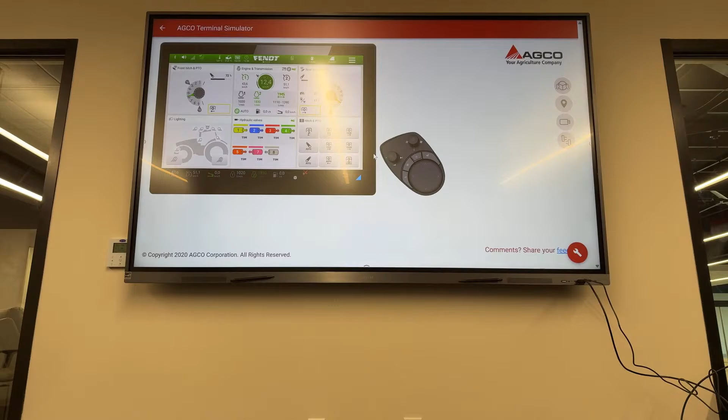That whole issue of momentum and tractor steering - it wasn't playing right. Remember that last year? We had all those issues. What did you end up doing then? Straight AB lines? I just used row markers. I just trusted myself because I never go... That is not cool because that Fendt thing usually steers pretty awesome. Do you want to log in and check?

So then we updated everything and it would work. Since that point, I would do coverage guidance around the edge of the field and it could be - like a straight, I would have just drove the headland and it's just like a square field and it would wander, like I'd be 40 inches and then I'd be overlapping the road. It would just wander. Even on AB? Not on AB, no, it's fine on coverage - AB, but coverage guidance, stuff like that, like on the next pass, like when you're actually supposed to be following the line. Even on this, it was okay, ABs were fine, coverage guidance was not.

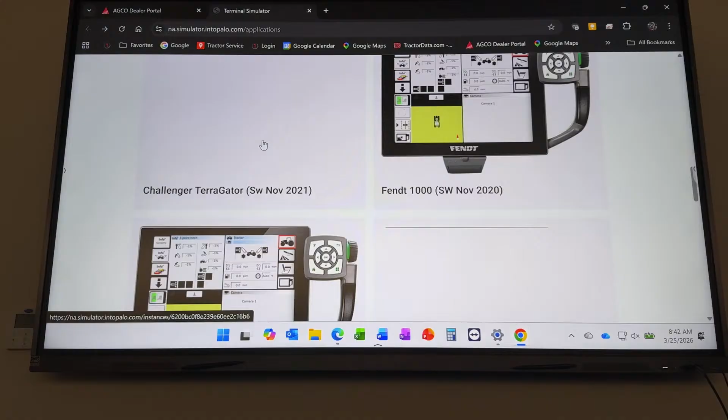TJ, look at that, it's fun. Is yours working, Randall? My computer's booting up, I'm not quite sure what's wrong with my computer. We're really having a bad morning here. My computer's going through a restart and it's not doing anything. That's fine, I'll go under the old one. We're going to the old one. We'll work it out, that's what we had to do. It's so weird, it like works and then...

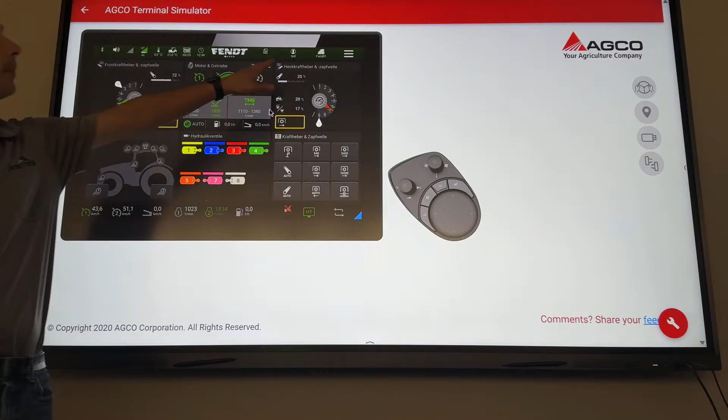Okay, so that's the work profile. That's cool. So we got admin, and here we can pick Ted. And now we loaded Ted, and you can see he's German, he speaks German. So if you do have multiple guys running different native tongues, you can set each of you up to run your own language.

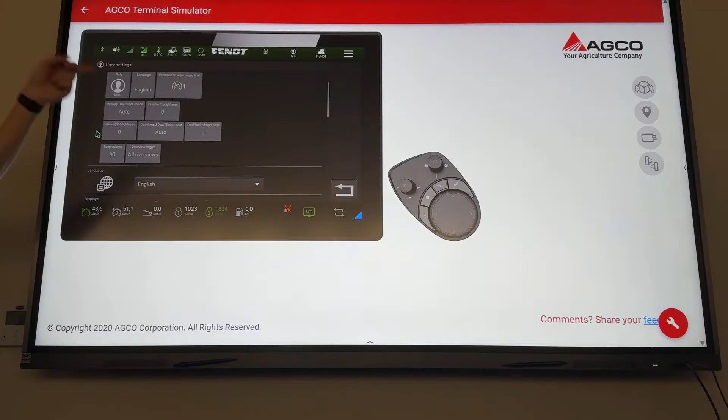But what I really want to point out is this part here. This would be what we called user settings in English. But all that's being changed in there is these things. Let me change it to English so you guys can read it. The user settings, you can change the language, the windscreen wiper, how that works, your brightnesses, and your beep volumes. That's all that's saved within the user profile.

So it really is only made for... unless you have the new seat, or the added new seat too. Then the settings are saved in the user profile for the seat.

Yeah, the titanium. Do you guys have the new leather seat in yours? Massaging and all. You don't have the massaging. It's just you guys.

So when you're switching users like that, say you have a guy that sits really far back, seat laid back, and another guy that sits way up front, seat straight up. When you switch between profiles, when it was saving that, doesn't that save that seat profile, how the guy had it switched and whatever?

That is, because the seat is saved in the user profile. What it was doing there when we switched users was updating the work profiles, just making sure it didn't miss anything before it changes the screen. So how do you update the user profile? Well, it should update that automatically when you switch, I'm guessing.

Okay, so now you can see Ted's switched to English. So the question was, if we change users, will it save the seat setting? I think it automatically just happens in the background. So each time you change it, it should save wherever your seat is.

It'll save the seat. So if you jump in and move it where you want it, and then you go and hit change to your next user, it'll screw the other guy's seat settings up. Yeah, that's what happens sometimes with us, when you got three different guys jumping in it, it gets moved around a little bit.

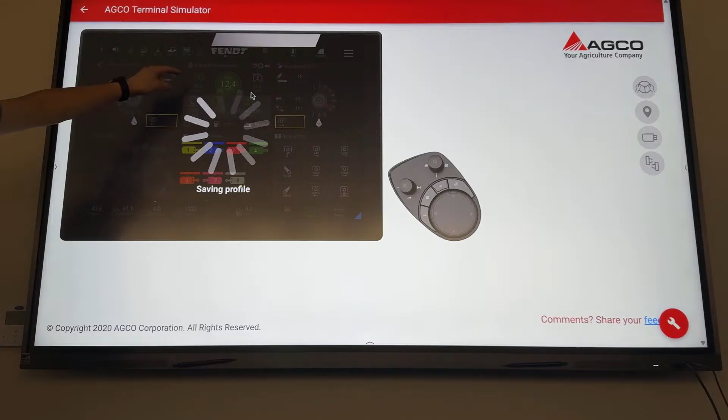But if you switch back to admin here... when it gets done.

So we switch back to admin. Also, whenever you switch users, it asks you to pick a work profile, like your planter profile, your spreader, or whatever work you want to do. So I'll just hit that.

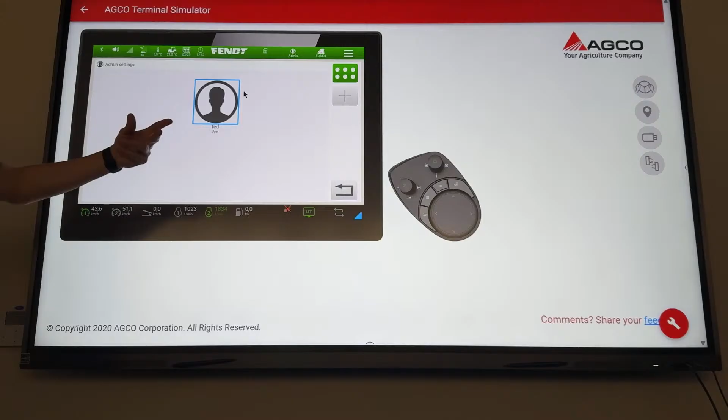Now if you go under admin here, you have the options to go to admin settings, because admin by name is an admin, and he can go in here and add and remove users, make more names and stuff like that. So if you can't add a user, you might be in a user that's not set to an admin, if that makes sense. Kind of complicated, but for you guys with this seat, this is kind of important.

That guy, he can go in there and change it to someone else's name. There's no limit at this point. He can go in there. It's not password protected. There's no passwords in between there.

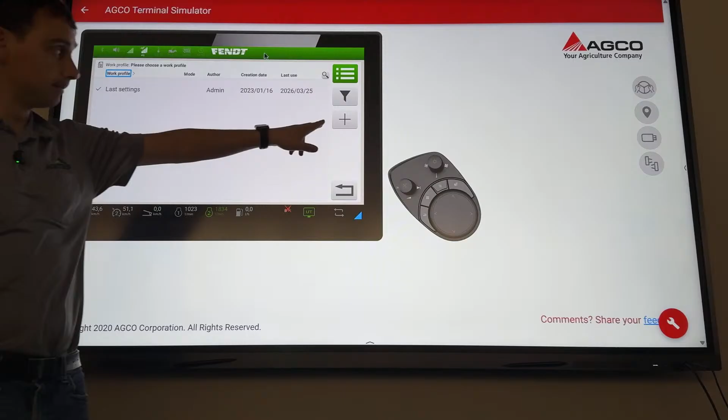So back to work profiles, I wanted to show something else here. So here's where you hit that up there. It shows you all your work profiles. To make a new one, you just have to hit this. I'll just put in drill.

Do you guys know what this is? Do you guys play with this ever? It's the AB version of the profile. So you can have a profile, but you can have two ways of running it. I guess in the drill there'd be some where you would use dip-switch remotes or something.

Do you guys use AB mode? I personally wouldn't use it. I don't like to set it up that way, because then it just confuses the next option. People get so confused - is it A or B? It's all the same. So I would recommend, that's what I wanted to show you guys - don't. I mean, if you want to, you can, then you have like two modes under the same name. But why wouldn't you just make a new profile and name it drill A, drill B? So that's complicated.

But all the layouts here, like the layouts of these tiles, is saved to the work profile. And that's something people often ask - how can I get my layouts always to be how I want for this implement? Because obviously you've got different layouts for different implements. Some you want the map screen here, some you want the hydraulics here, some you want the cruise here. Like when you're carting, you probably don't use GPS at all - not really, usually, unless the people try and set it up.

Don't tell me too much. Hey, people do it up a long hill.

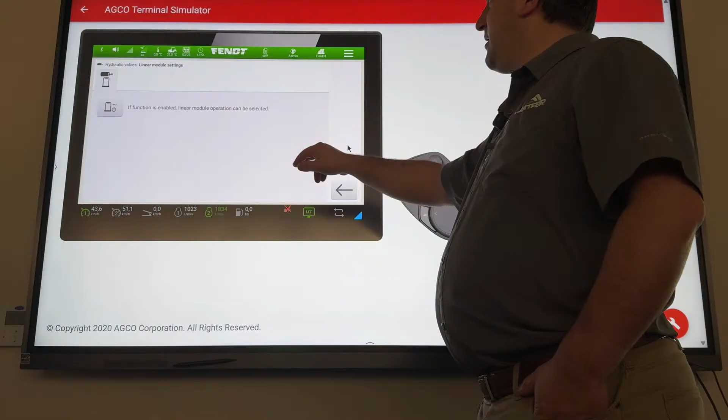So if you go into here, it's not in this one, but it would be here, another button you hit right there. Basically what it allows you to do is if you toggle the remote on, whether it's plus or minus, the next time you bump it, it just goes into float immediately. So if you have a hydraulic motor spinning and you want to float it to the stop, it'll automatically go to float. You can't accidentally not float it.

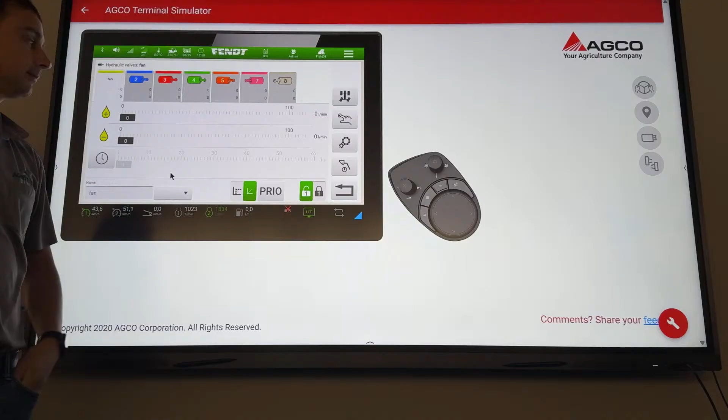Okay, any questions on hydraulics yet while we're here? What's that loader one, I forget. Oh, that's assigning the crossgate lever, that automatically happens. Is that when you hook up your loader? Actually on the tractor screen? I never saw that icon. Did anybody else, on our tractor? Yeah, I was gonna say that's a new one for me. I'm not quite sure why that's there.

All right, let's go start with the implement setup. That's the most important part of the GPS, because you have to set up the implement width, or it doesn't know how wide to make the passes, right? So it's very important how you set this up. The easiest way to get there is hit this top right corner, that's what we call the hamburger menu. Tractor functions, anybody know which one it is?

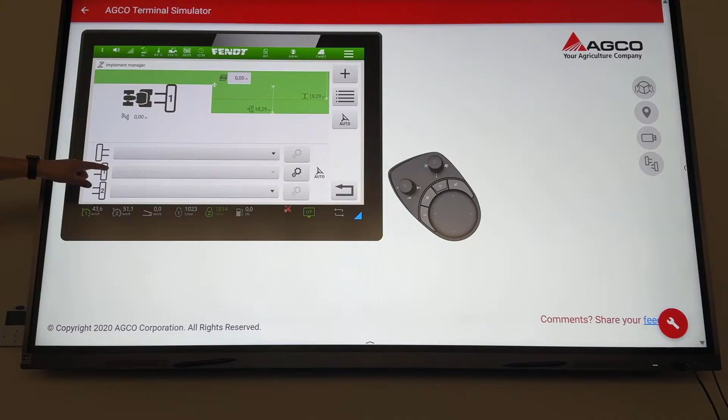This one right here? Yeah. All right, implement manager. So this is the implement manager overview. We can set one for the front and two for the back, 2 implements for the back. If you have a momentum, it automatically populates, any isobus implement automatically loads the widths in there. Like in this case, you go in there and it's already loaded. Now this thing's all in metric, so it's all messed up.

So we're just going to make a new one. It's called Implement 1. What implement should we set up today?

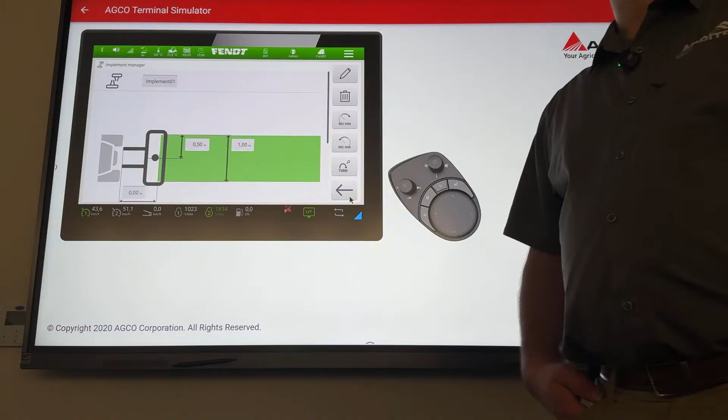Anybody have one that was really challenging, or it was kind of weird and you couldn't figure it out? Yeah, that planer from last year, whenever it pulled a little bit to the left, we were trying to figure it out. So if you have an implement that doesn't quite run straight behind you, let's just say...

I'm going to enter these numbers as if they were feet. It says meters, but I'm going to enter them as if they're feet. So we're going to have a 40-foot planer.

Where does that 20 number in the front come from? Anybody know what that 20 stands for? To your drawbar. Drawbar to where? The edge of the right side of the implement. Yep, to the edge of it, but it's actually the far right side. So that's how you get your offsets taken care of.

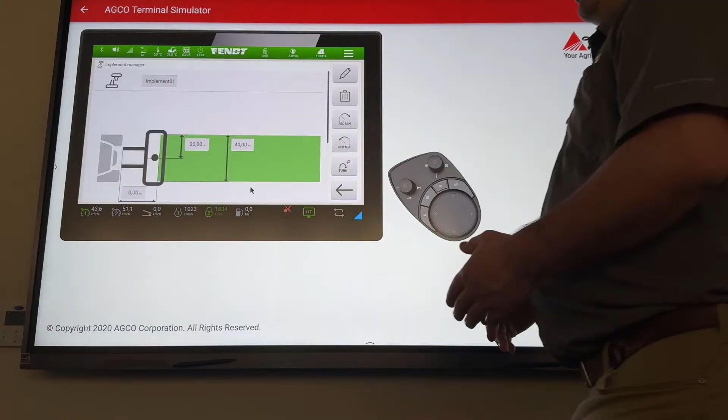So when your planer pulls about 6 inches to the left, what should I enter in there instead of 20? Should it be 20 foot 6 or 19 feet 6? If it pulls a little to the left, yeah, 19.6. Because if you enter 19.6, the right side is going to get closer to the drawbar, which will shift it to the left. Does that make sense?

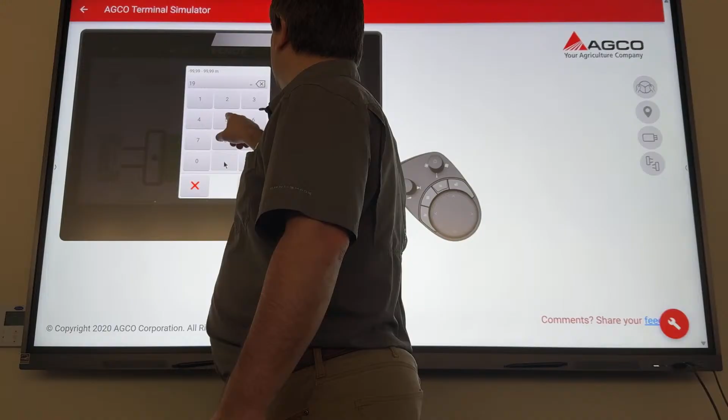So we're just going to go 19.6, and oh, it's meters. Okay, yeah, we should go change that.

Real quick, can you guys tell me where I go to change my units? I'm going to make you guys work for today. Admin settings, system, under system setup. Well, it would... you won't actually be able to change it in admin. I mean in the user, but you actually, yeah.

So here it shows you what you've got. You've got all metric. If we come down through here, we can start changing our units.

Get rid of, do my period like I want it. And did I miss any? Yeah, I did, missed a few there. It's right at the bottom. Yeah, I think you got it. Okay, I think we're good now.

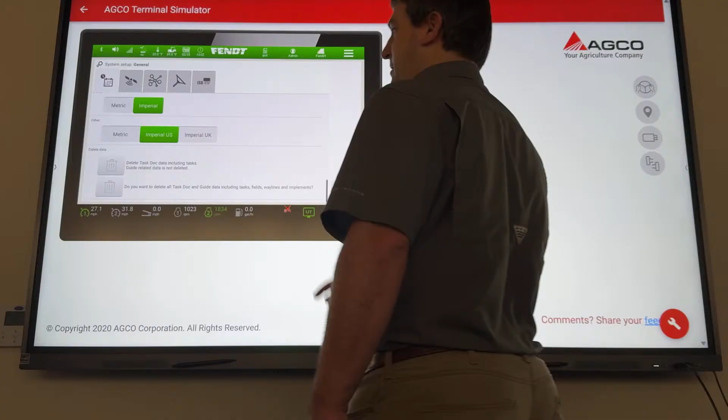And now you're back. I like using this little keyboard. Anybody use this little button here? I use that one, I don't know. It's one I like, it takes you up to this menu right away, and you just grab an icon. That's this little checkerboard-looking thing, it brings up all your icons, and you can jump right to the one you want.

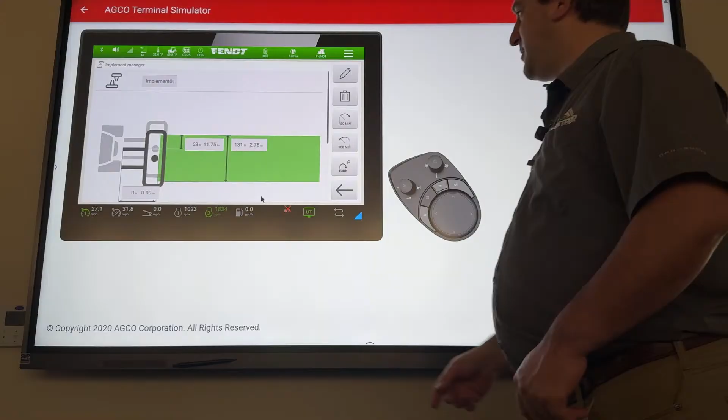So now we're way out of whack, let's start over again. 40 foot, and we're going to make this 19 feet 6 inches. Okay, so 19 feet 6.

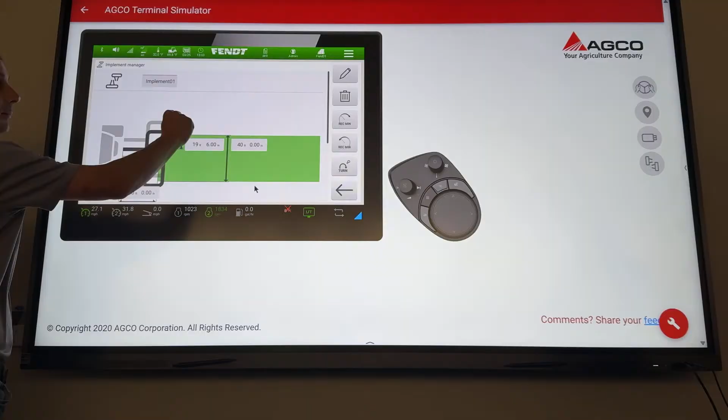So you see how it shows it to the left? See how the tractor's here, but now the implement moved this way. It's kind of a neat visual if you're not sure what you're doing, because it is kind of complicated to think about that you're changing this number here. It's a little hard to say that we have to subtract to make it go left, but they give you a visual to make sure you're thinking the right way.

So if he takes it the other way, even if you're down to only 1 inch off, it'll still show it. It'll only show centered if you're dead on.

So let's change it to 20 feet 6. So we're to the right. Same thing, no, it went the other way. That's another easy way to visualize what's happening. So if you shifted it the wrong way, you can kind of see it.

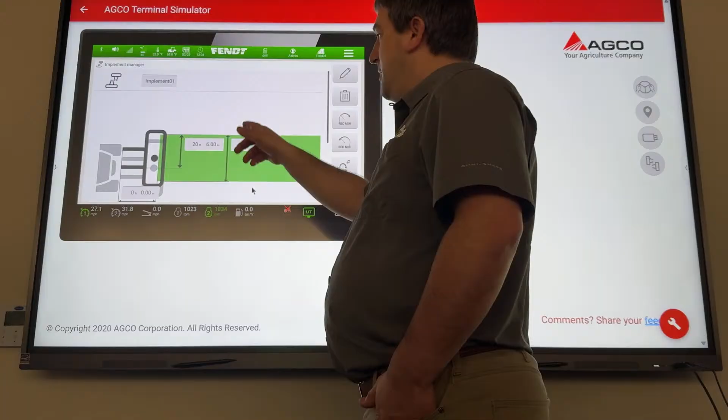So let's go back and play around with like a 15-foot pull-type discbine. This is one I think is kind of fun.

You ever pull one of those Hydra swings? Or if you have a side mower. Side mower, yeah, this one. Oh, a side mower. What is that, 13 foot? I don't know what it is. Is it a 400 something? Yeah, or three, it's a 400 probably. Pottinger 401 or something like that.

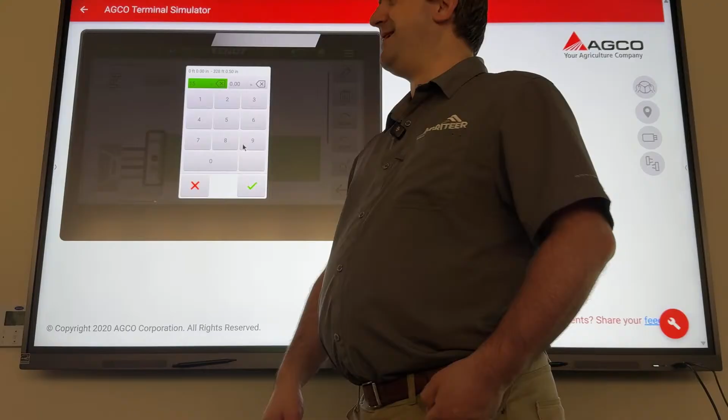Is it Pottinger or Claas? It's Pottinger, the front's 350. Yeah, 352, 352 I think. 352, and we'll go with 12 feet, that'll be close. Yeah, I think it's a 352. 350, I think you're right. 351. Hey Carl, welcome. So it's 12 feet wide.

Now what we've got to think about is that's 12 foot and it's cutting past the tractor, right? So how wide is your tractor from drawbar to the tire?

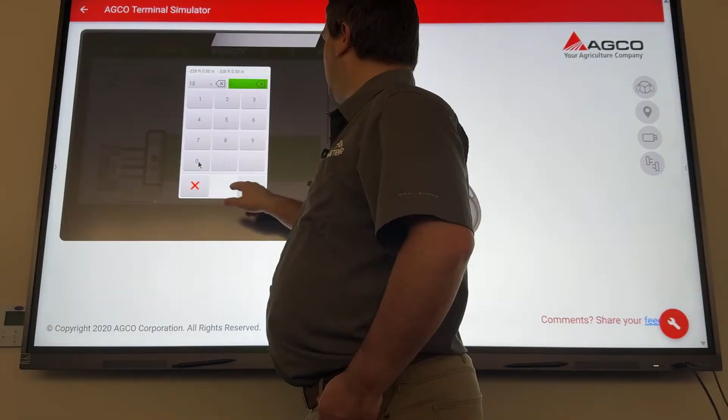5 feet? You probably don't want to cut closer than a foot to the tire. From the tire to the left side of the mower is probably 6 feet from the drawbar to the left side, plus your 12-foot cutter bar. So you're 18 feet from the drawbar on the right side. So this number here would actually be 18 feet, 0 inches, because it shoved the whole way over.

Now let's put it back about 1 foot because maybe we got 2. That's not quite right on the tires. So let's just go back to the map screen. That's what I want to do. I want to show them what set up happened.

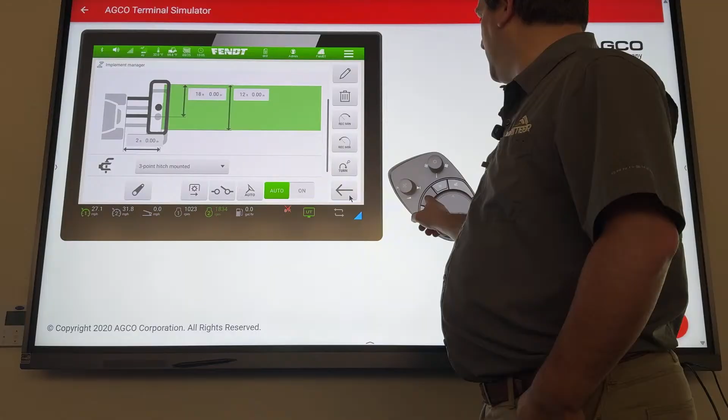Our cutting is probably about 2 feet behind the hitch, on a 3-point hitch. Let's go look at this on the map screen now. I just like doing this. So there, we got it all set up. Does that look great? It'll actually auto steer based on the area where it's cutting.

Your auto steer line will be right through the middle of your mower. Especially with the front, then you throw the front one on, and it'll actually balance the line in between the two.

It gets kind of fun. Yeah, it still has the momentum. That's why it's still back there, the momentum on the back. Showing the momentum in the back.

I'm gonna turn the bus off and we get rid of the planter. There you go.

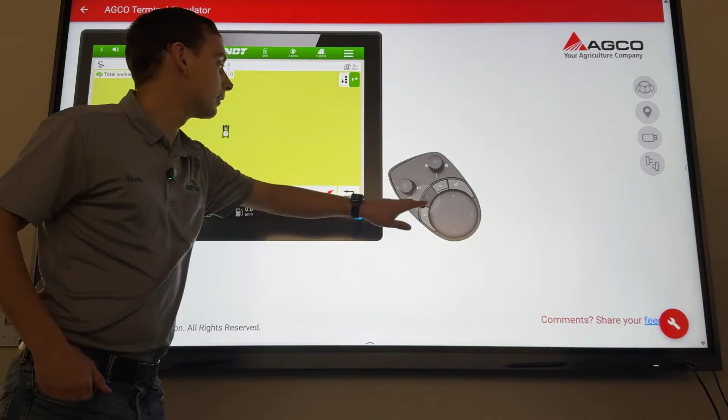Oh, no. What happened to your drill? I'm not sure, is my drill on the bus too? No, it wasn't. The drill went bye-bye, I don't know. Oh, there we go. There we go, there it is. Back to square one.

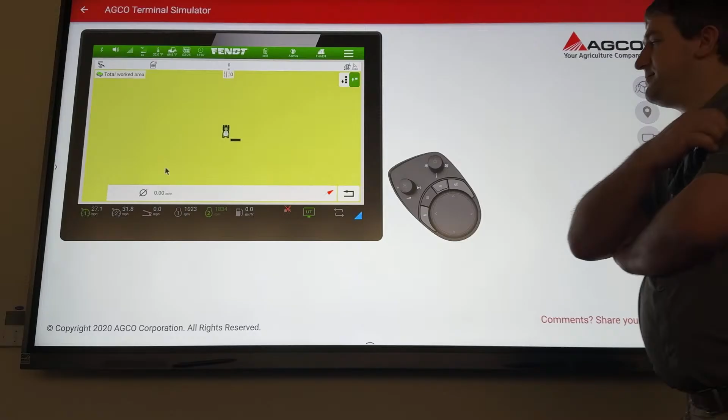So then you throw your front motor on there too, set that thing all up. It gets to be kind of fun. Go back to the triggers again, talk about that a little bit. Set up triggers. Do you guys figure out all your mapping triggers on the GPS?

You guys kind of get that? So one thing he did here, he set up a drill which is 3-point mounted, but here's where you set it for a drawbar. And then you get one more measurement that you have to know. Do you know what measurement we got that we didn't have before? What's the measurement that was added on for the drawbar?

To the wheels, yep. Why do you need that? Because of the turning radius, stuff like that. Yep, so the track's good.

One of my best days, I know this doesn't sound good because we haven't been having that good a luck, Hunter, with the planter over there, but I had a grain drill. It was early on, like the first, second year I was at work here, and we were just playing TerraStar C Pro, it just came out, so it's like plus or minus 1 to 2 inch accuracy. It was a fairly flat field, about 15 acres, with a big oak tree on one side we had to go around. Otherwise a fairly square field. We got the thing going, second, third pass or so.

Coming into the turn, going around and coming back, it wasn't real sharp turns, so it was fairly easy to model and track. We had pretty much about a 7 or 8 inch spacing the whole way across, even between pass to pass. That was a lot of fun, got that drill set right perfect. So once you get the numbers right, it does track pretty good.

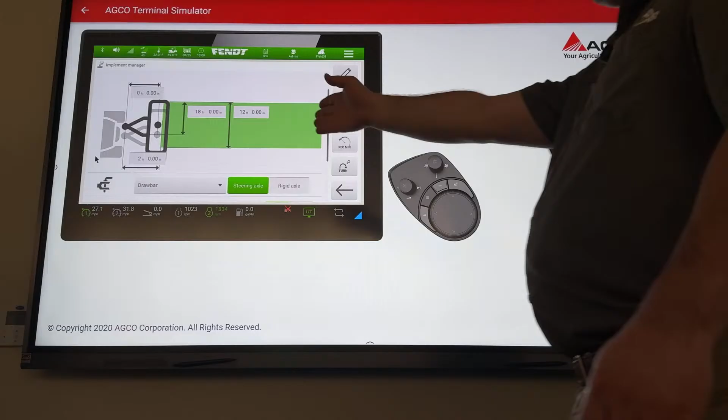So for our drill, it has a dolly, it'd be like a John Deere. What's the correct setting for that? Well, that one's tough because it actually pivots at the back axle until you put it into the ground. Then those back tires tend to slide through your turns a little bit. Because of the drill, your turning point almost should be at the back set of disc gangs, or it's a little hard to tell on something like that.

Cause I know ours, like it should be. Around the turns, ours ain't like it should be. It doesn't model very good. What do you think?

Think of it like you have a trailer with a single rear axle. When you move the tongue to the left, the back goes to the right. You want to be right on that pivot spot, because that's what the thing's trying to figure out - when I turn the drawbar left, where does it pivot, what happens to the back? So it pretty much should be right where the gang is, right where you think that is.

But on a soil engaging implement, it can be a guess. Move it around, don't be scared to change these numbers. Just change them until it seems like it's doing your thing.

A row crop corn planter, usually your wheels - the momentum's different. My question with the momentum is whenever it auto-populates from the isobus, it says it's a steering axle. But it's not, yeah. But I guess it should stay on a steering axle for the modeling. I don't know, there's a lot of arguments about this, because I don't know if that was part of the problem too or not. You can play either way.

We think that steered axle, even if it's not a steered axle implement, trails better - seems to be more accurate. Like a merger, an Oxbo merger, where your tail actually swings to follow the tractor, it seems that it models better under steered axle. I don't know, try it one way or the other.

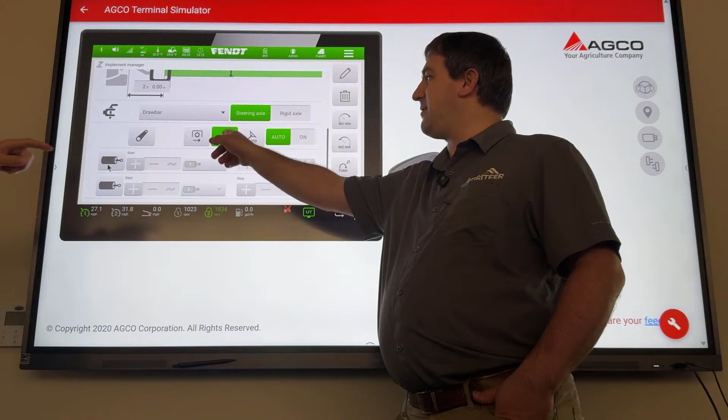Another one that'll often get you is if you have something weird like that one highlighted, which you're not actually using, so then it just won't paint at all, even if you have the right one on.

So this is a place you can actually wire in a switch. Let's say you put a switch on your planter, like a whisker switch, that's what that's for. And then this one here is another one.

That one starts the mapping whenever you engage the auto steer. Seen guys use that on a lime buggy, one of those little lime buggies you just shoot across the field, spread a little something. Use the auto steer to keep it nice and accurate, but no other trigger.

It's not just running off of anything. It's running off a ground drive, and maybe you have a rope to do something, but if you put it on, it's just going to be on all the time. You see people plowing call in with that problem too a lot.

Like, they say everything's grayed out. They think it's some glitch, and then it's just on. Do the 'on' one if you're plowing snow, so you know where you all went.

Okay, any questions on this type of stuff? You guys feel pretty comfortable? Get this nailed down. All right, does anyone know what the turns are there?

Record turns, you guys see those on your screens? That's auto turn, that's what it is. So if you ever get really to the point where you're like, man, I'm ready to sit back and let the tractor do everything for me, except drive to the field and start, you can get auto turn unlocked to your tractor.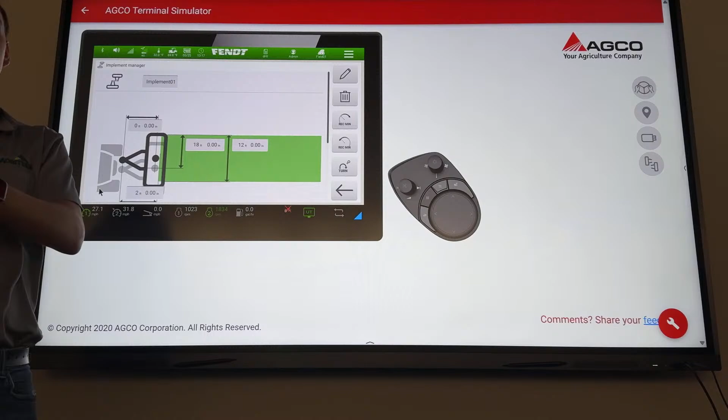But what these buttons are here for is so you have to record a maximum turning, like you have to set a minimum turn, minimum turning radius. So basically, you have to set it so that when you make a tight turn, that it don't jackknife. You have to say, I have this implement on, which I can only turn this sharp.

So the one thing I did learn, if you ever mess with something like that, even on another brand, is think of your minimum turning radius also like on a hillside. It kind of fights you even a bit more, because you slip a little, you have a heavy spreader, it pushes you around a bit as you turn.

So we had a farmer playing with it a bit, and yeah, it works decent, but it's just a lot to set up, and it always makes you nervous a little on the hills and things.

Show them how to make a boundary? Yeah, that's what we'll do here.

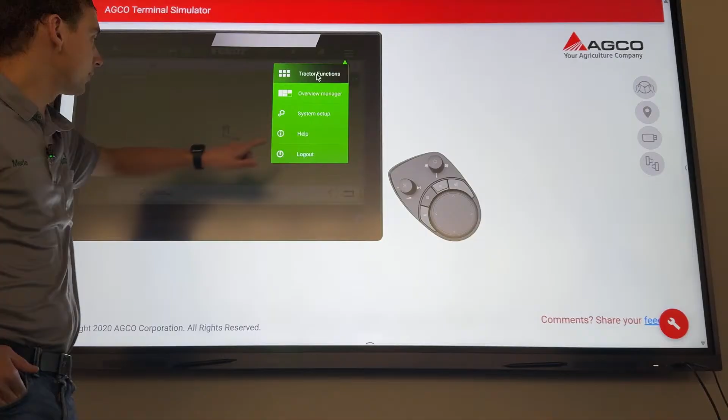So next thing we'll do is go to this map screen, play around with this thing. This is our GPS map screen. You get that by either going up here to tractor functions, or you could have it assigned. You have this icon here that minimizes all your icons.

But how many of you know that you can put the GPS on the dashboard? You guys all figured that out? Do you know how to zoom that on the dashboard? You gotta press this button here and then zoom it.

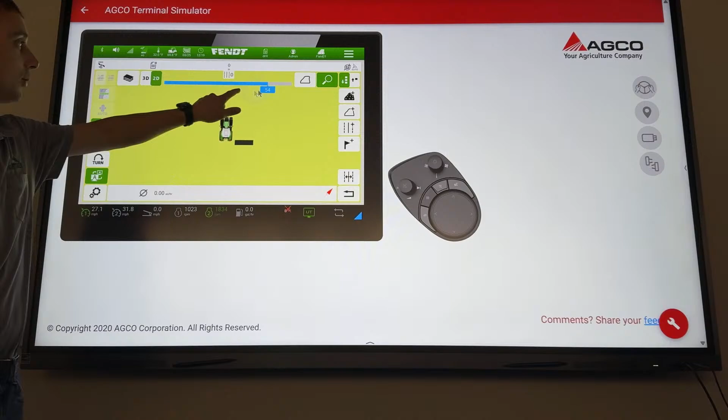If you don't have this selected, you can slide it and it'll zoom around. If you hit this, it'll do both screens at once. You have to turn it off again on your other screen, or else it'll keep doing your little screen too. Once you get your little screen set where you want it, you've got to set them both the same.

The other thing is, since November, if you got the latest software update, you get pinch to zoom like your smartphone. That's really cool.

Also, we can pan around now instead of having to go look where you're at on the other end of the field, to see if you did that one corner. Before, if you had the old software, the only way to do that was to hit this, but it only worked if you had a boundary.

I don't think they worked on our tractor. Has to have a boundary around the field to do that now, yeah. It's only since November that you can pinch and zoom. So our tractors don't have that yet. If it wasn't there since November, you don't have it. Next service will get it done, I guess, if you really wanted. Tell Randall to do it on his way home. You don't live all the way up there. Yeah, I know, okay, all right.

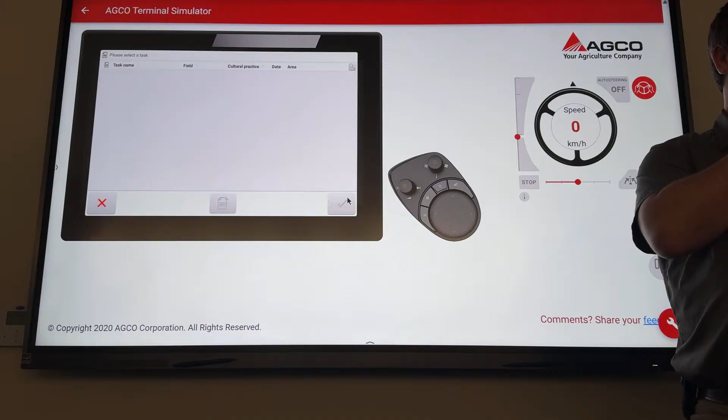Okay, so this is one button they should add to the old screen, this is annoying. On the old screen, you can't make a field from the map screen. You can make waylines and boundaries, but here you can. And right away it asks you to make a task, but this is only if you want to keep track of data. If you don't want to, just hit the red X and keep on going, you're not stopping anything. So our new field name is always up here on FendtONE.

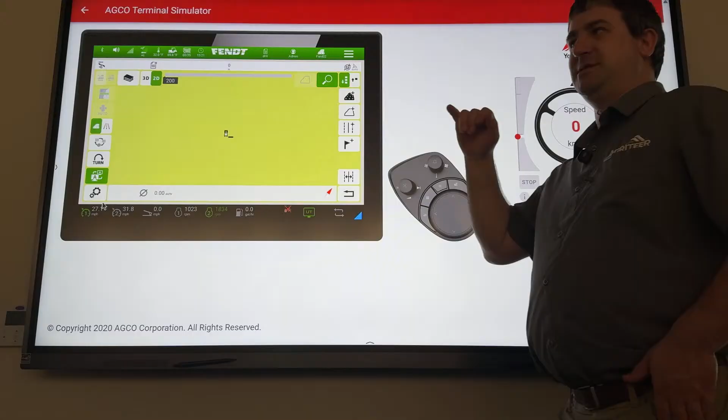On the old screen, you don't really know what field you're in unless you go look, and you have to go back into the VarioGuide menu, which is terrible. Here you can just hit it and it takes you right to your list. That's really nice.

And this is your auto feature. If you have headland, if you have boundaries in all your fields, and they have that highlighted, you pull in, it pops the field name right up, select it and go. But you have that in your old one too, yeah, you would have that as well.

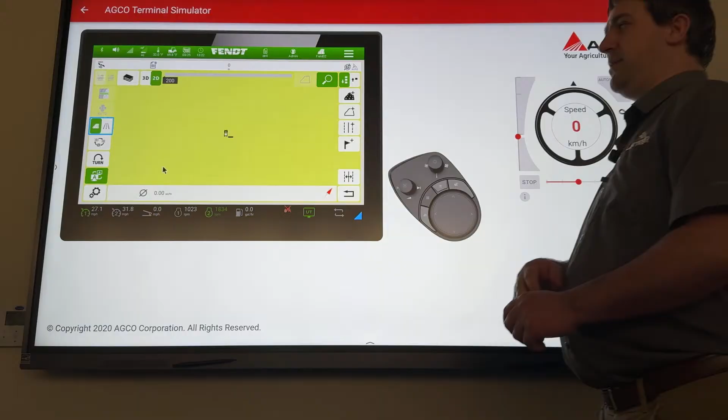So that's one reason you should always make boundaries, because if you have that auto turned on, you drive in the field, it pops up asking if you want to use this field. Kind of nice. So now we'll go ahead and make ourselves a boundary.

So the next one down there, which one do you guys use for boundaries? Which of the 4 - recording, worked area, contour segments, or delete, obviously not that - do you guys know which one you prefer doing boundaries with, and what the field's like, recording or contour segment?

Okay, so I'm going to show you worked area. This is one I kind of like using. It'll hook up and use your implement position, or it'll use the implement being up or down to pause it and stuff like that.

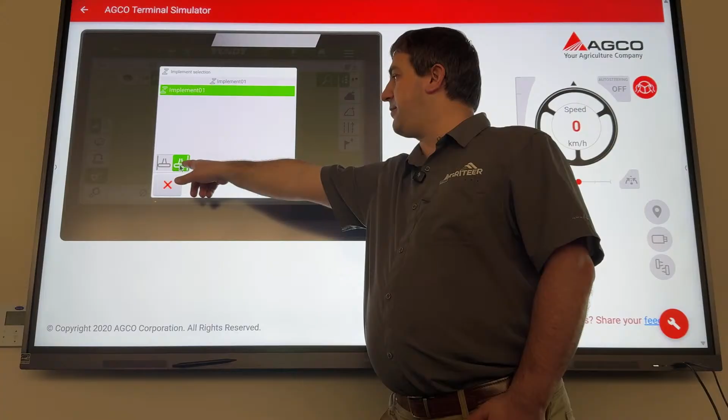So I like doing the right side of the field, so I'm going to pick the right side of the implement. That's about which way you go around it - yeah, depends which way you go. Then you always have to hit start before you start driving.

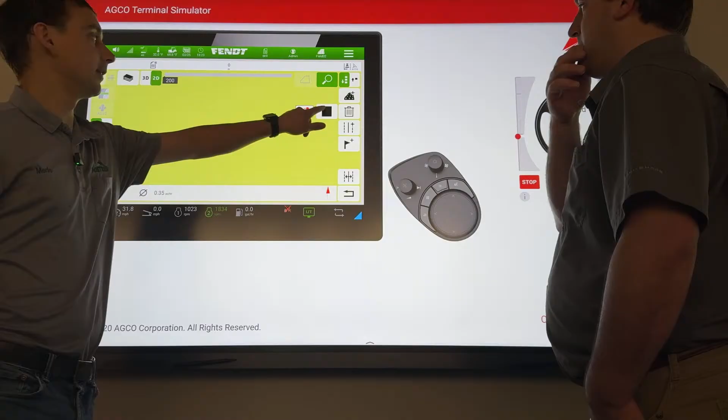Now this thing's a little clunky, but we'll see if we can make ourselves a field. And it's not drawing a line again. No, it detected we're in that field - not field 1, not field 1. Wait, I think the problem is it doesn't detect that you dropped the planter because we have no way to drop it.

Let's try making a regular recording instead. Do the right side - there you go. The difference on this one is it records to the right of the tractor, and it's always recording. I wasn't dropping my implements, so of course it wasn't recording anything. Here you can pause it.

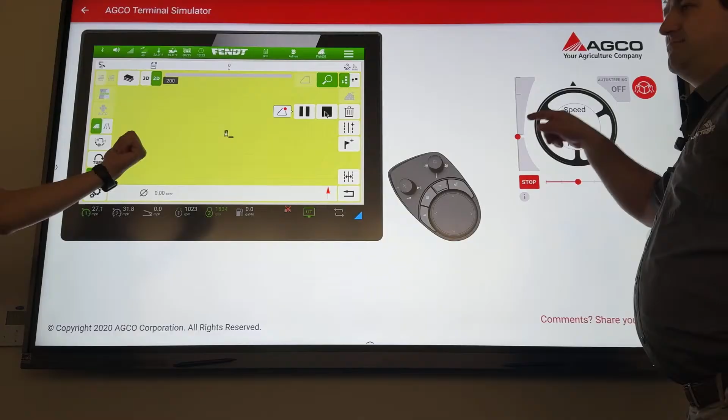The other one doesn't have a pause option, because it's doing it off whether you're mapping in worked area or not. When you drop it, it starts your boundary. As soon as you lift it, it pauses - you back in the corner, drop, pull out. So you can start your boundary and go the whole way around your field, because every time you lift up it'll pause, and every time you drop it'll start again. It might make a few funny lines in the corners, but for the most part it's pretty cool.

Let's try driving again - can we make a boundary? This thing is really buggy. Hey, look at that, we're getting a line.

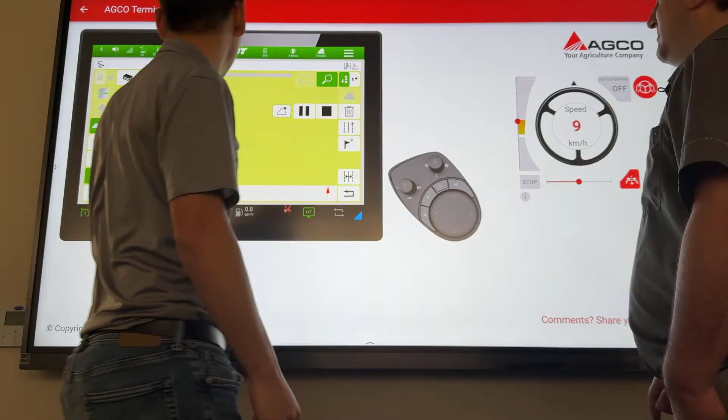No, I want to watch you make the turn though. I thought that makes it automatically turn, but just hit that again. Turn the wheel. Yeah, I'm not sure what that does.

Oh, that's not bad at all. That's actually a pretty good turn. This is actually pretty hard - I wish it was better. I don't know why it's so buggy.

Oh, we've gotta have some fun turns for contour segments. It's that big old sinkhole we've gotta go around now. This is a real Pennsylvania field. You've gotta put a real tight corner in there too.

You have to stop and back up for one of the corners. Don't make him stop with that thing. We're just gonna keep going right around the field where you're on the outside. Yeah, that's right - if I'm not careful, I'm gonna end up being on the...

Yeah, exactly. All right, Merle, I'm gonna get you to pause it. So let's stop there - why don't you get me to pause my line? And we're gonna try some very delicate work here, trying to turn around, and you'll notice it'll draw a white line as it spins around.

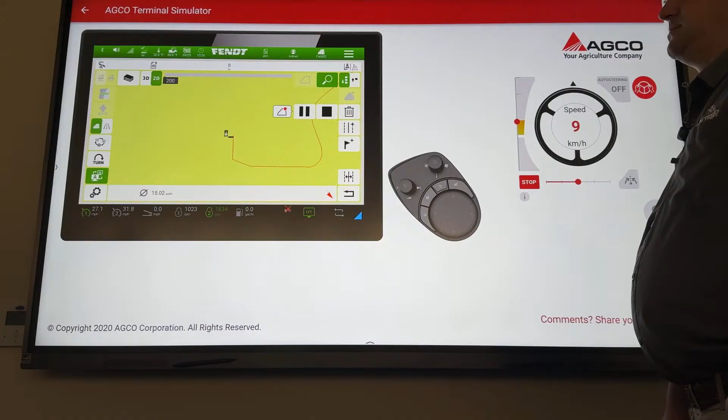Now it'll turn that one red, so we're just gonna start recording from there. It just draws a straight line between your pauses. That's important to know because some people get caught on this and forget to turn it back on, then drive halfway down the next side, realize it, hit it, and boom, takes the corner of the field off.

I'm not sure how much your field's gonna get small because you're recording on the wrong side of your implement. It snapped me together there, I believe, or something. What did it do there, bro? Where'd that come from? Not sure either, but anyway, I think that's your starting point.

Back to your starting point. You're on the outside of it. Yeah, we might have came back to where we started. I'm gonna just hit stop. Something don't look right here, but anyway.

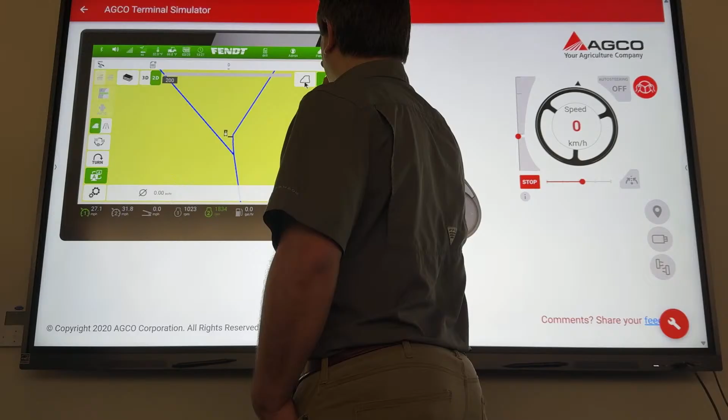Let's see how good of a drawer you are. Why does it do that? I don't actually know what it did at all. Well, now it don't even show us our field. Yeah, it already shows our field. Well, it like snapped the line. I'm not quite sure what it did.

I think you went around the field the wrong way. Well, I think my point was right up here, wasn't it? I think too, because it drew it across. For some reason it made this other line over here, so I went down around it. But you're on the wrong side.

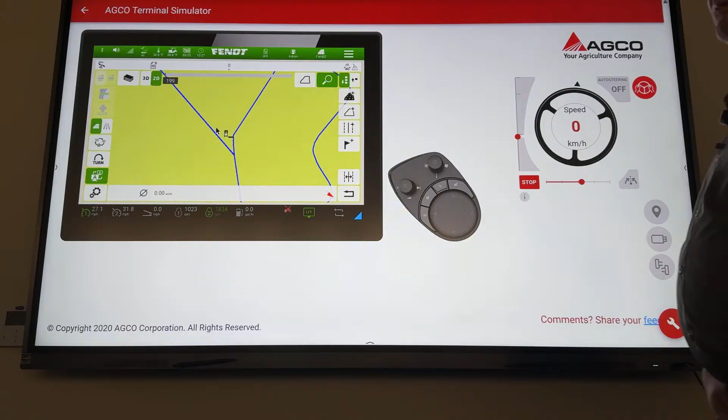Yeah, but it's out on the right side now. You should have made a left turn, and you went around the right. I went on the right, so that probably messed you all up. I didn't think that would matter, but anyway it shouldn't matter, it just made this field smaller than it actually is. Either way, anyways, I think it's...

You got the idea, so that's how you make a boundary. You guys know how to do guidance lines, obviously.

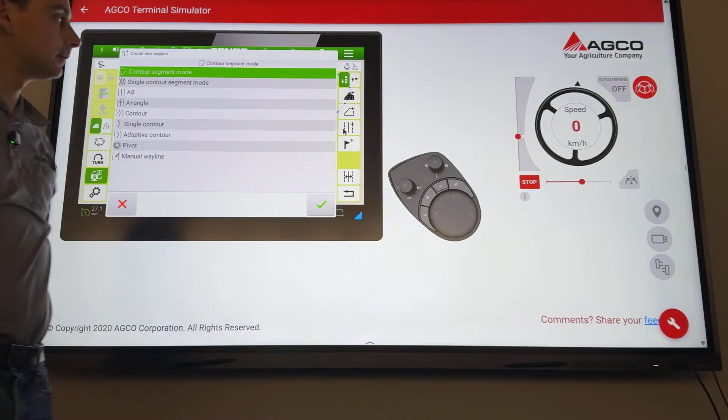What's your preferred guidance line? Or what are your most common ones? Contour, AB, A, B, or contour. Yep, that's kind of what you guys often use.

Do you guys actually know what the single contour segment mode would do? Don't use it, huh? So the only place you'll use something like that would be like an orchard, somewhere where you've got multiple passes but you don't want to repeat them, but you want the guidance line to be there.

So like each row of trees might be slightly different. You go ahead and record a line for each one, but when you pull out of the first one and turn around, you like your line to be ready for the next row. So you can go through your whole orchard, save them, kind of like you would contour segments out around the edge of a field, but it'd be a guidance line for every row. That's where you would use that.

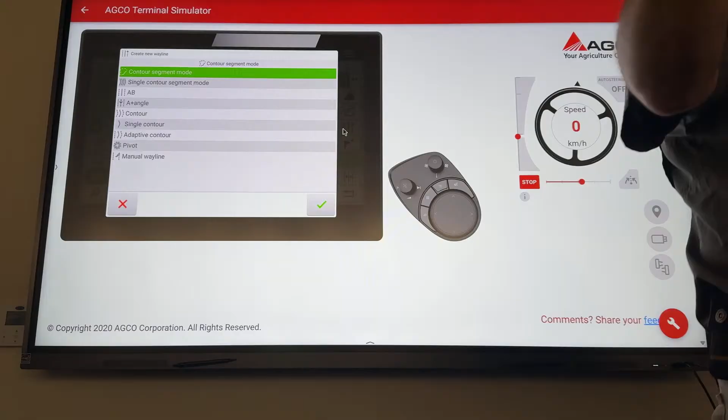The only other place would be if for some reason you had a test plot and wanted to come back through and side dress, and you didn't plan it, and you're going through for somebody else. You could use single contour segment mode, and every pass across that field would be its own pass, never repeated. So the first time you spray it or go through, you could set up all your guidance lines the whole way across that field. Next time you come through, you can save it.

There's also one called single contour, and that's even different yet. Single contour is what spray guys use in Europe in wheat. So I enter the field at this point, that's where you see those pictures. The sprayer guy sprays the whole way around the field, then he sprays this loop pattern back and forth, and you see the aerial shots with the perfect tire tracks.

There's only one set of tire tracks where they spray it like seven times, so I'll use a single contour. It's one guidance line, but it goes the whole way through the field, and he follows that exact path every single pass it comes through. And that's why they have their tram lines where they actually don't plant any wheat in certain spots in the field, because that's going to be the wheel tracks of the planter, of the sprayer. Does that make sense? You'll probably never use them, but that's what they are.

So what's the difference between contour and adaptive contour? Have you guys ever used adaptive contour? Probably the only place to use it is like mowing sometimes. Some guys, you mow around a tree, and your next line, it'll always give you one guidance line right on either side of the pass you just did. So it'll take your last pass and give you a guidance line based off of that, so it's always adjusting anytime you make a turn. So some guys might use it if they're trying to get a field straightened out. A lot of guys are just going to make a new contour line and keep on going.

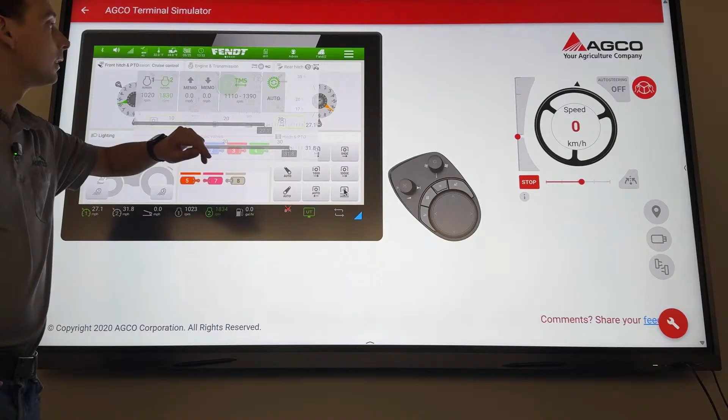So you've done all these things. Sorry, my voice is starting to give out on me. Yeah, that's the same way with the older generation auto steer too. Yeah, with our triple mower, reverse station, it's the same way. I'll use that for doing my next pass around, and it's the same way, you have to just re-engage the line coming around. With contour segments, yes, it will not automatically jump, you have to disengage and re-engage. That is correct. It's just picking up a new A point. You got it, you have to disengage and re-engage.

All right, so I'm just going to go pick this field that's in here. So this is a nice field, a nice square field. Oh, it has a task. More square than the one I drove. Yeah, more square than the one you did.

Oh, great, take it away. I'm going to grab me a water.

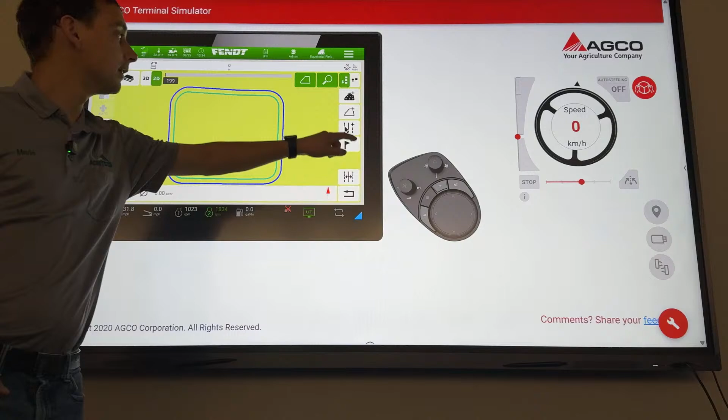All right, let's zoom out here. That's our field. How many of you guys use this? One of my favorite way lines that I learned about from a customer, that I never really used much, is this A+ angle. Do you guys use that? It's a really neat way to quickly make an AB line.

If you're not saying a whole lot, you just want to pick the direction you want to work in this field. You pick this A+ angle and here's how it works: it pops up with your heading. This is the heading of the tractor, based on a compass, so 0 degrees would be north. If you drive in that direction, you pick the direction you want.

So let's say you're pointing across to whatever marker on the other side of the field, or this is just the way you're going to farm this field. Pick your heading, and then it gives you this: it says I'm going to be 236 degrees plus my A, so wherever we drop A, or just wherever that A is from that point, that heading.

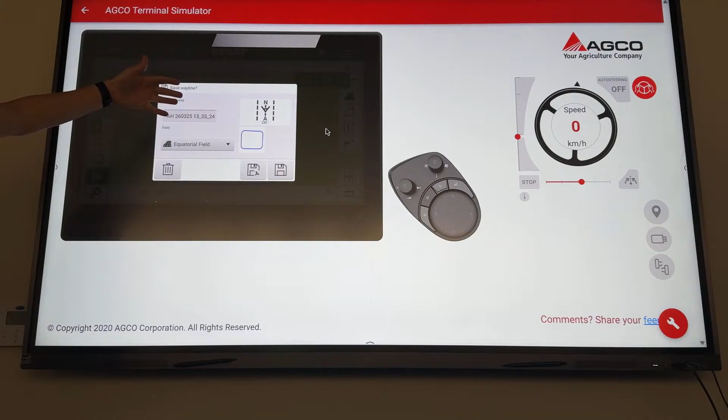And just like that, you made a way line. You didn't even have to drive. Then obviously you got the two options, save and steer, and just like that it should show guidance lines.

Where are you at, Randall? Auto steering off is the map. Oh no, there we go, auto steering is on now. That's funny, it didn't, but it should have made lines. Not sure where our tractor is. Oh yeah, I'm not sure what happened to you. Where are we? Well, it's just showing your field right.

Yeah, but it should have strike lines, check that out. Well, I'll do it wherever we are. Yeah, we're way across the world somewhere. Anyway, did it make lines there? Yeah, it made lines, but it should also show it from the overview too. We're outside of the field though, it doesn't like where we're at.

Oh, so that made an AB line without driving it. That's right, rather than driving 30 feet and dropping your B, you could have done the same thing by setting an A, driving 30 feet, getting to B. That's right, you just point it and it'll make it go that way.

For mowing and for disking, people like it for that because it's not critical how it is, you just strike a line and get going. Then you have straight lines for mowing, raking and tedding, baling it. Everything's kind of straight, but it all depends on what you got in the field. I think for merging it would be an option too, it should work for merging. Use that in mowing.

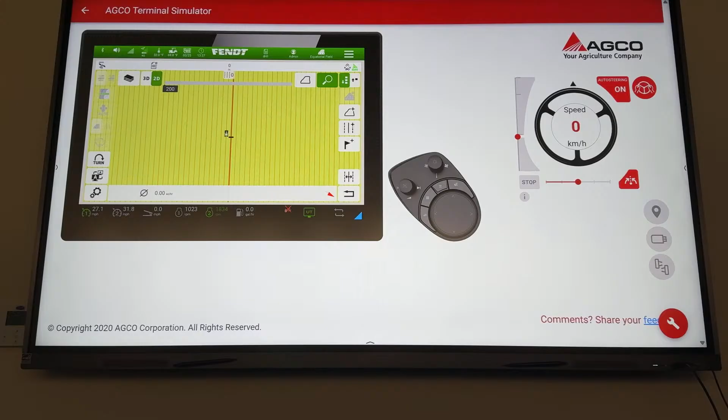Well, is that on the new screen? Yeah, it's on the old screen too. Never done it with that. Yeah, it's called A+ angle, people have had it 10 years ago. Yeah, it's been around since the beginning. I used it one year to plant my corn north to south. They say if you plant north to south, the sun can shine in more and it'll make more starch.

So planting a 180, straight south. Yeah, you could. Think about that, bro. Yeah.

One question, so on a regular swing mower, if you're coming how you have it with the offset on one side, if you have a mower that can switch, how would you do that, or no? No, not really, you have to be switching your implements then.

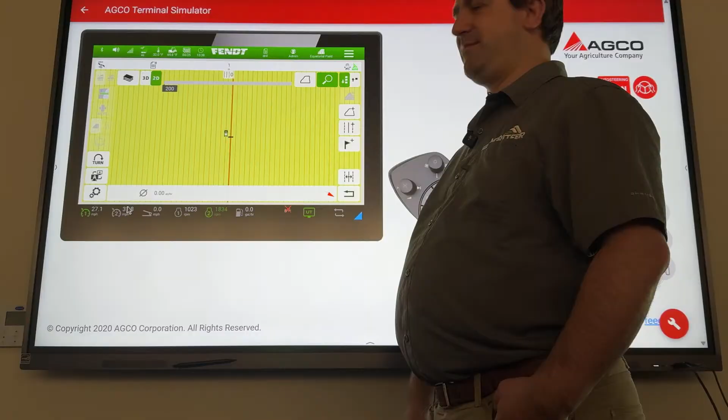Came up last night too, your best option, is that the way that guy was working it out? No, go with it. I think you could nudge your line. If you know the exact difference, you could always nudge your line. Or you could just nudge the line.

Into settings, into steering settings. Let me back up, just make sure you guys are following me. So this is your map, down here's your settings icon. Go into that, and up at the top we're in field.

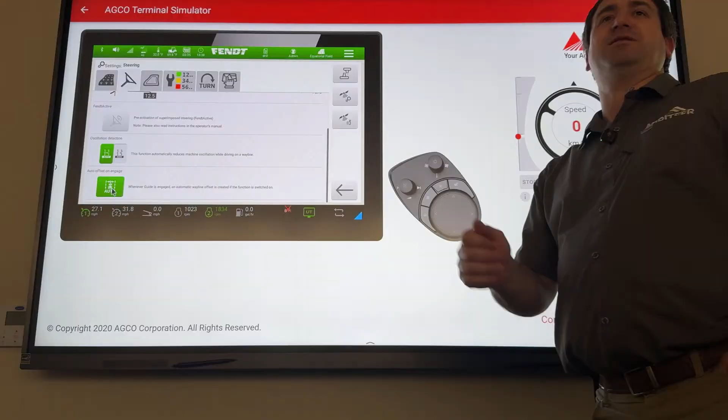Let's go to steering. If you come down here, there's a fancy button that can make your life really miserable if you don't want it turned on. It's called auto offset on engage. So when you hit auto steer engage, it'll center your line up right where you are every time. That looks cool if you want it, but if you don't want it, it's not cool.

Your corn rows go all over the place. So yeah, whenever you engage auto steer, it makes the line right where you're at. So it's a great idea as long as you remember to line yourself up where you want to be.

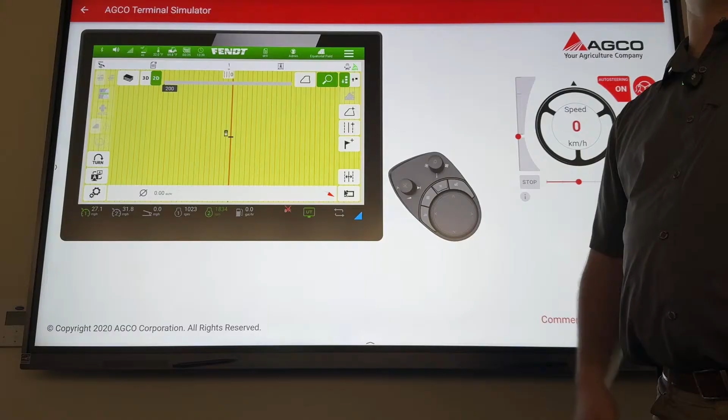You swing your mower, you have your rows going the way you want them. You swing your mower around, and then you're like, 'Yep, here my mower looks good.' I'd hit auto steer, it centers your line right in the tractor and takes you back. So it's a way to cheat the system.

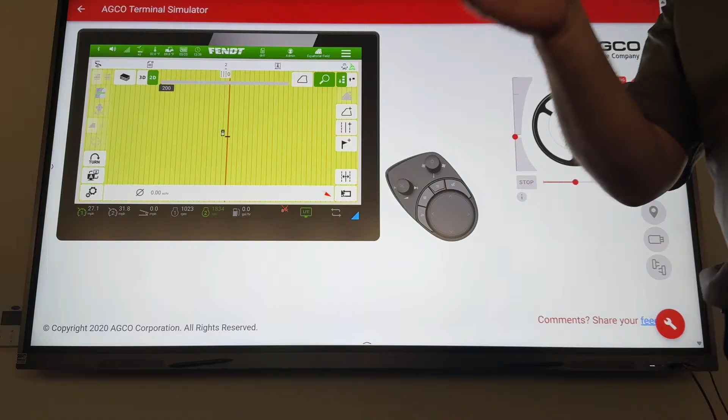But yeah, the other option also works good on grain carts if you're actually running on the field and the combine's in your rows. You pull up beside the combine, you're like, yeah, I'm centered, you just hit auto steer and it'll snap you.

If you have that line on there, you just follow those lines, take you straight down the road. It'll keep you the same spot for the combine. It won't match your speed, but it'll keep you in the same spot for the combine. Yeah, that works good. It's another way.

We use it for merging, because when you're merging down through, you're 24 foot wide, and then you jump 10 foot over because you have the swath, and then you're not on your line anymore. So you have to nudge your line.

The other option you have, you could just do it with a nudge in here. You could just put it like, because you want to go on the other side of your windrow, right? So maybe 10 foot.

Set this to 10 foot, set that to 10 foot, and then you have the arrows. But with FendtONE, you can even put the nudge on your white buttons, which is really cool. So you'd set the 10 foot in there, and then you just hit the nudge. We were using that button too.

You might have to pop it up. Yeah, like the one is there. Oh, it's working? Cool, yep.

I think our simulator just crashed. But anyways, it's been a little bit problematic. I don't know why it's so buggy, but it's giving us a little bit of a headache here. I can try to read it.

Any other questions, guys, any particulars that you're taking away? We need to get back with you guys on that steering thing. Either that's something momentum related that hopefully is taken care of.

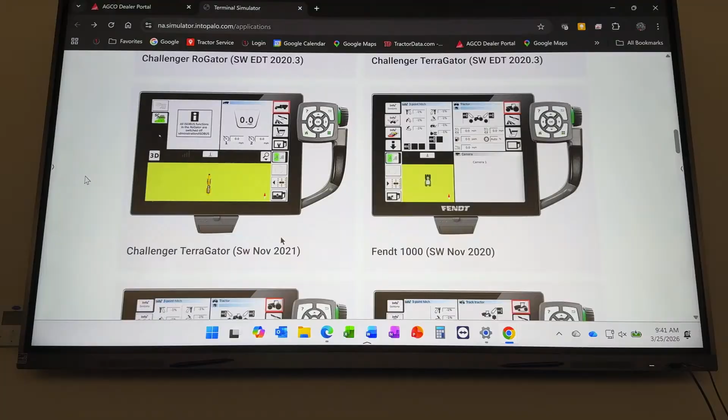I want to say when Jordan was out, he told me there was something that gets unplugged on the planter and should solve it. But that never got done, right? No, that never got done. I was thinking Jordan was the last one that touched that, correct?

Did we ever just make sure it doesn't load it as an isobus implement and just steer it like a regular planter? It's a different one, but it still overrides it, I think, because you need the isolation. Remember I had a different profile in it and we just override it every time.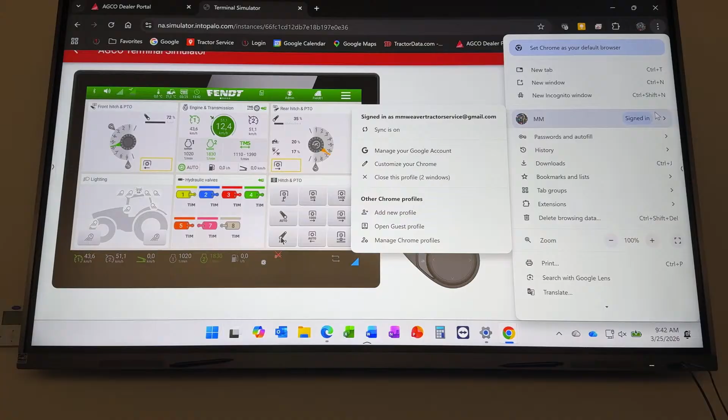That thing there really seemed to take control of that tractor. Which is cool when it works. But there seemed to be, and you have a straight 1630, so I wasn't always sure if it was fighting itself because of the center trailing section through the turns, if it's trying to model that. I don't know.

The split row ones get even a little more complicated because you've got a whole bunch of measurements in there, and it changes when you have the splitters up and the splitters down. That gets really complicated. There's a lot going on.

Yeah, so here we got it. Now we're back. But yeah, here. Now.

So this goes back to your merging application. You could set up a 10-foot offset because you wanted it the same every time. With the hydro swing, I don't know, do they always lock at the same spot? Pretty close, yeah, you can lock them full lockout. It'd be the same, but sometimes you're not doing that, and it can be a little off.

The other thing is, you'll figure this out as you play with it. You know what this button does right here? That's really neat. So if you don't like where your guidance line's at, and you don't feel like trying to nudge it left or right, you just grab the steering wheel, drive it to where you need to be, and hit this, and it puts the line right where you're at. It's basically the same as turning auto steer on.

Another thing we should point out is if you go in here and do what Randall was saying, hit this. It's the same, except this is linked to whenever you engage the auto steer. This one always will send it every time you hit engage.

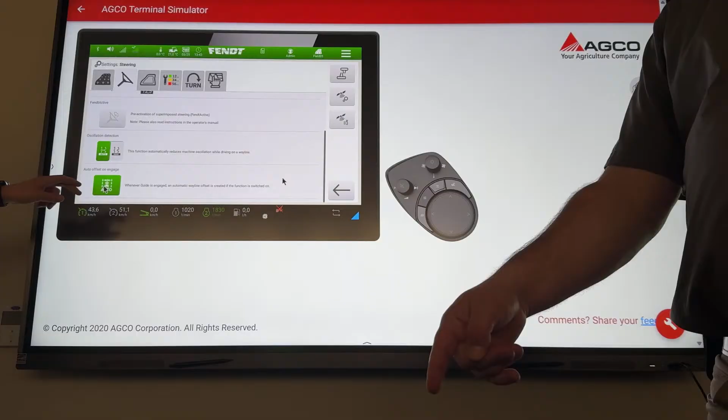We actually use the other one. Oh, okay, use the other one. Yeah. This one does it whenever you hit Set on the auto steer, the white button. You hit the white button and it drops. What you won't like is when you click this button on to always do it every single time, and when you don't want it to shift the line, it'll shift it. Corn planter guys hate that.

But you can always tell if that button's pushed because it'll put a symbol up there. You guys aren't doing it that way, you're doing it through there, but you're using a white button to do it, which is really neat that they made that on a joystick button. So that's a good point, you can customize that.

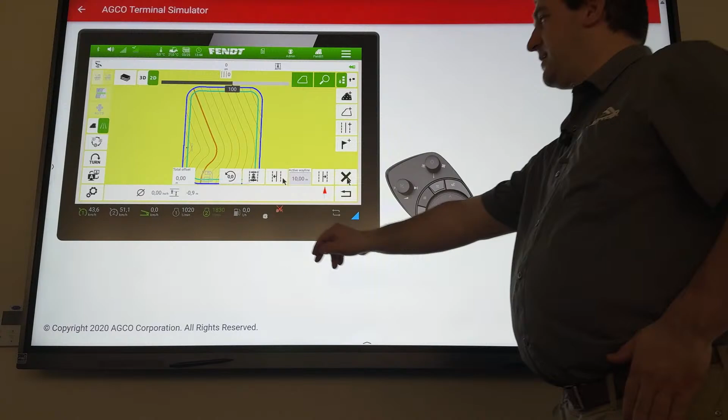Are you guys aware that as you jump around with these nudges, it'll show you how far you've shifted your line total? In case you ever wondered how far off you are, and you can always go back and hit that reset button.

So that's something with auto engage - if you set it up like you would with your hydro swing, you can see how far you're getting off. But I think the total offset's more important to a guy who's trying to run in between his last year's rows. He wants to know, oh, I was hanging on the hill, so I nudged it a little bit. Now I'm down in the flats, and I'm almost running back on my rows - well, I'm at 20 inches offset instead of 15, so I need to bump it back a little. That makes sense, like when you're on the hillside you might have bumped it up a little.

Other than that, you can reset the line. So if you hit save, it'll actually make this line centered up right where it is now. Oh no, it'll save a new AB line - sorry, I'm getting ahead of myself. So if you made those changes and you're like, oh, this is actually way better than my original one, you can hit save and it'll make a new AB line.

We'll just nudge it over - yeah, it'll nudge it over. Right, but you can say, it actually saves that nudge as a new AB line. So that's new, I don't think you could do that on the old one. I'm pretty sure you can't, not that I know of. So that's new too, which is kind of neat.

You can nudge it, and then if you really like it, you don't have to always remember every time you come back to nudge it. It's back to metric again, but when it was in inches, you could change that down to a 1 inch nudge, like if you're doing it on a hillside planting corn or something. If you just want to nudge an inch at a time, or if you're merging, change it to 10 foot - it's got quite a lot of adjustment there.

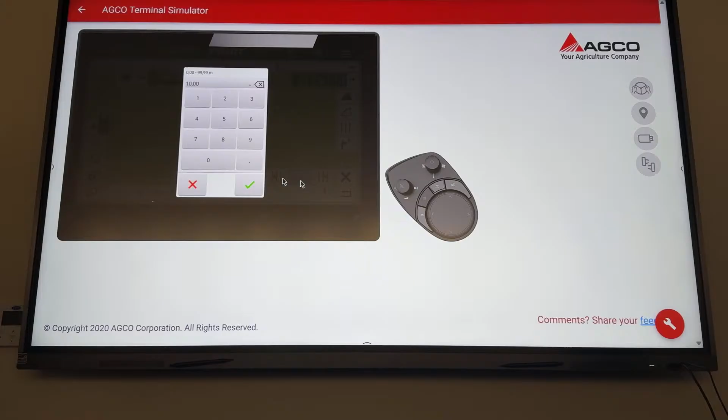Whatever your application is. I'm guessing those nudge numbers would stay in the work profile. Yeah, I think they do, they stay with your profile. So if you had the corn planter set to 1 inch, and the merger set to 10 foot, it always goes back to 10 foot when we come back. That's some cool stuff.

Anything else? One thing, if you want to get to your GPS accuracy settings, just click up here on that satellite, and that'll take you in here. It'll show you which signal you're on.

Here's your different signals. SBAS is WAAS, that's your free one. Then here's all your options, these are your paid options. So you guys are running TerraStar C, I think. Are you running L? Hunter, are you running RTK? Yeah, you are running RTK.

Yeah, so let's see, one thing in here, you can see your accuracy and all that good stuff.

Here's the tree icon here, this is interesting. You have it on yours too. This tree allows you to steer with a bad signal. Right now this thing obviously has no signal in the sim. You will not be able to engage auto steer when it's red. The minute you hit this, it turns orange, which lets you steer. So you shouldn't probably have that turned on unless you're steering in a place that has really bad service and you just want to go. You should probably turn this off because you don't want to steer when you have a bad signal.

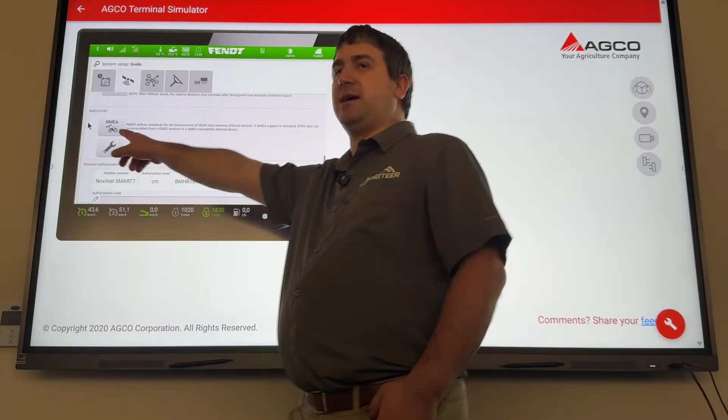Sometimes if you're renewing your subscription, we might ask you to get that for us. Go back up there a little bit, Merle. No, go back to NMEA. So if you're running a 2020 planter monitor, this is where we're getting our GPS out of here. That needs to be... is that where I want to go? Yeah, you're right, it's this one here, I thought it had to be green.

Oh no, yeah, that one needs to be green. For some reason you don't get GPS when you're on the 2020. Somebody may have turned that one to gray. That's just turning it on and off, basically like a little switch in this thing. So it's basically the switch that turns the GPS out. In the corner of your Fendt cab, you have that serial plug, looks like an old printer plug. That's your GPS out, and that goes to the 2020 or whatever. You need to make sure that's turned on.

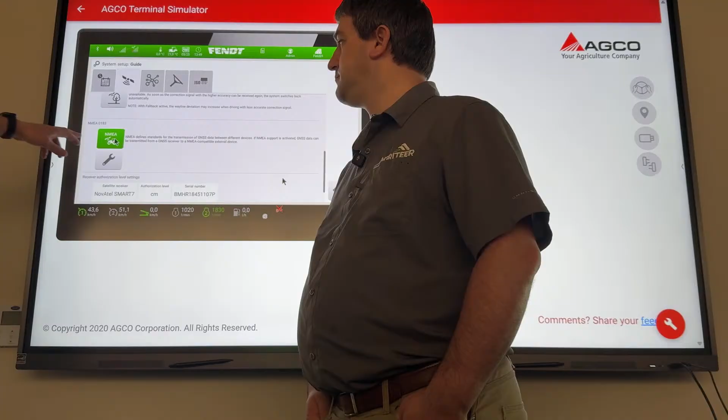If you ever want to change settings, it's actually the wrench. You probably won't ever have to mess with that, it should be set up already, but that's where you would actually change the settings. Sometimes we have to set those up. Do you have a first time 2020 user? You running one? Yep, just got one.

Yeah, yours will be the same idea though. You have to make sure it's turned on, but it's in the VarioGuide main menu. Then you go down, there's a wrench, and in there it says NMEA, and at the top there's a toggle. Same idea, but it has to be turned on or it won't read.

So what features are you wishing for yet on tractors? What are things you wish you had on the screen, or didn't have on the screen? Wish it would do that it doesn't do? TJ stepped out, but we can make a list for him.

Android Auto, Apple CarPlay. We had to get new Google Maps on there, I think that's going to work once you have Android Auto and Apple CarPlay. So Apple CarPlay is coming in June, we get CarPlay. But how is that going to work, is that a retrofit or no? Yeah, so actually we just got our first tractor in that has the right hardware for Apple CarPlay, and you can tell because your volume knob has that guy talking on it, like your cars have.

Yeah, Apple made them put that in there, because that's your Siri button. So we just got that. There's a 1050 that just came in with all the hardware for CarPlay, but the software won't be released till June. For all you guys with old tractors, there's a couple hardware things that have to change. They have to change the radio unit in the roof, and you have to change that little button pad. So it'll be an upgrade, but it'll probably be, I can't imagine it'll be less than $2,000 just to get CarPlay. Android Auto is supposedly coming, but not real soon. So it'll be for Apple only.

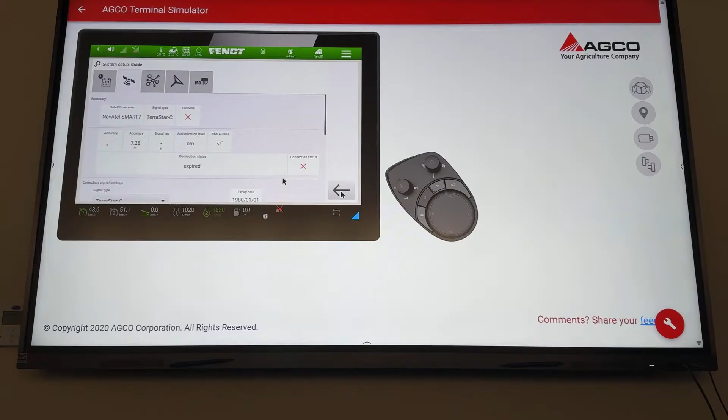Did you get the sensor for the 728 figured out for the subframe? Did they? I thought we notched the frame. We got the frame, but not the sensor mount. Oh, that's not done yet. That's for the 3-point, for the front, there's the lift sensor. So you have the comfort front 3-point with the position sensor on it. Yeah, that's just been disconnected since you put the push frame on. You never gave that a thought. Never. I knew that.

I'll check into that. We got the frame cut out so we have turning radius. Yeah, that's done, but we need to reposition the sensor. That's a good reminder, I needed to check into that. I thought that was taken care of, but yeah.

So it gives the code every time you start it, right? This is one time, right when you start it up. Once in a while, the same tractor gives the fuel tank code. No, for the level sensor. Yeah, it's not every time. That's good, I'll write that down. That's probably the sensor in the tank, still having problems with them.